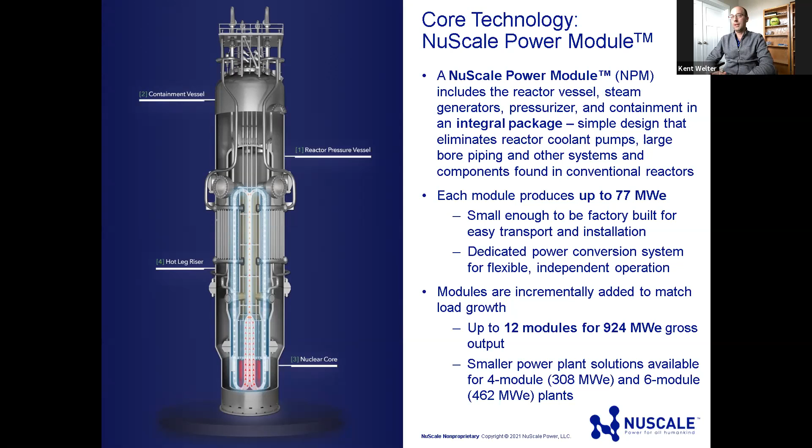We recently got certification for a 12 module reactor, standard plant design in the US, but we have smaller power plant solutions available as well, such as a 4 and a 6 module. Next slide.

This is a simple chart that shows how, on the top left there, number 1, power modules can be factory fabricated and then shipped to a site and installed to meet the power demands of our customers.

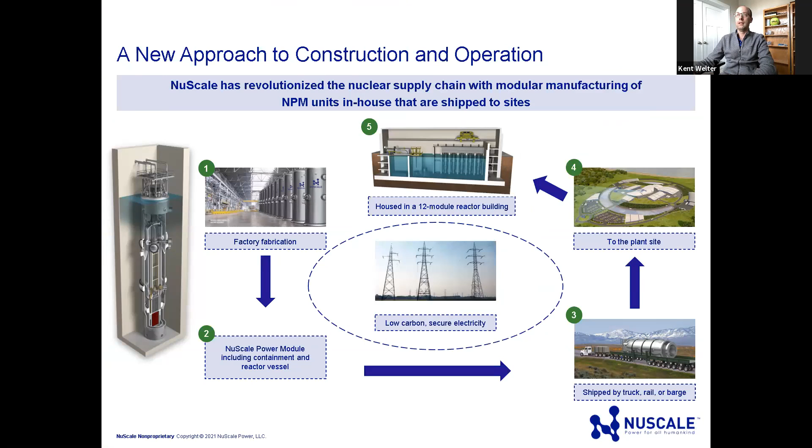As I said, we've received NRC certification last year on a 12 module reference plant. We are working on developing the necessary packages for long lead time procurement in the next couple of years. I'll show a couple slides on that.

So from a systems engineering perspective, I'll be talking about how we're going from the left side of the V into the right side of the V, where we're starting to produce parts, manufacture, and build things.

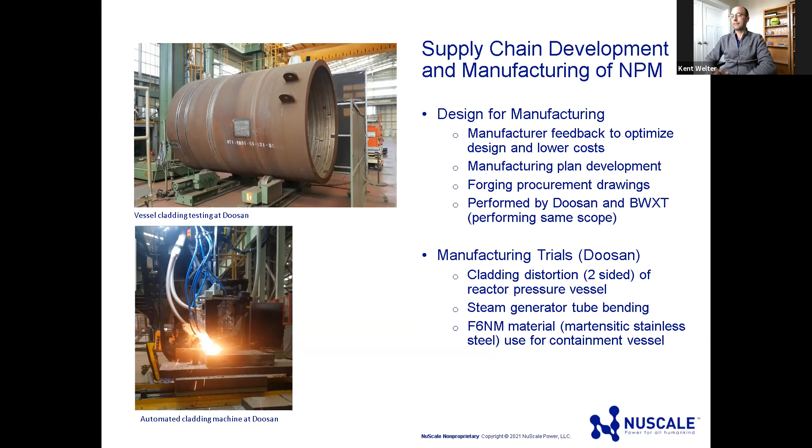So with the introduction to NuScale and where we are in the product lifecycle phases for the first plant, what is systems engineering? In the simplest way, systems engineering is a proven set of tools and techniques for managing the complexity of large projects and products, with the goal to control costs, schedule, and quality.

This figure on the left is the Arcadia model-based systems engineering method. It shows how there are methodologies and tools to take large projects and products and develop requirements, develop different views on how they're going to operate, and how to structure the requirements and products in a meaningful way, such that as designers, when we take a large complex thing and need to break it into smaller pieces to design it within different groups or disciplines, we know how to put it all back together so it works as intended at the end.

I actually gave a presentation, I think towards the middle of last year, on NuScale's model-based systems engineering pilot that we did. I think that was at an ANS meeting, and I have that available for folks if they're interested. Again, it's just a proven set of tools and techniques for managing the complexity of large projects or products.

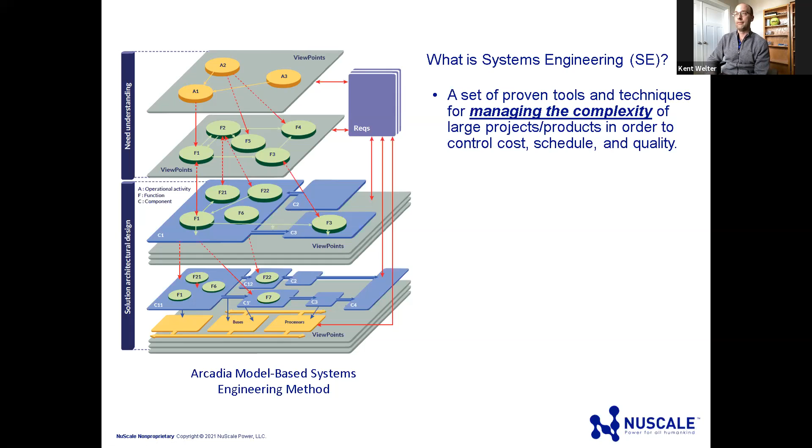An important aspect of systems engineering development and programs are systems thinking and the V development model. There are different versions of the V development model, and there are even W development models. There are different ways to look at it, but it really provides a structured way to move from the beginning of a concept all the way through retirement of that project or product.

The V part really focuses more on the technology development, and this is the NuScale system V model. It's very similar to what you would find if you just Googled system V model - you get a lot of different charts that look very similar to this.

The idea is we often talk about the left side of the V, which is the system definition, requirements allocation, and derivation, where you start off where someone in the business says, hey, we have an idea, or you get from a project office that we had to do this big project or develop this complex product. So you work to define the business requirements and the customer requirements.

Once those are defined, there's a handoff and integration with a design team to start developing that functional design, that architecture, the system requirements and functions. Once that happens, you can start to move into preliminary design, or what's called high-level design - both from a broad perspective as systems are added to that system of systems, and then as you get deeper, you start creating lower level design artifacts, going from step 3 to 4. Obviously all this is iterative between those 1 through 4 steps.

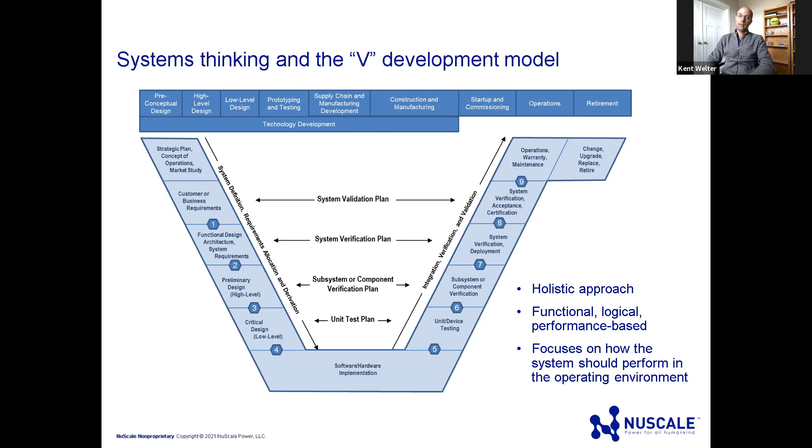Next slide, please. All right, looks like we lost some figure there, unfortunately. Yeah, I'm sorry, Kent. This is the actual presentation. It's not the... oh, it might be animated. Can you click a couple times maybe? I thought we were working off the PDF. Yeah, can you click? There, yeah, it's just a little animated.

I forgot. So the value proposition really for systems engineering is lower cost, shorter schedules. You can absolutely design a nuclear power plant the traditional way. If you could advance again, I think the value proposition really is that by implementing some proven systems engineering best practices, you can shorten that time and reduce the cost.

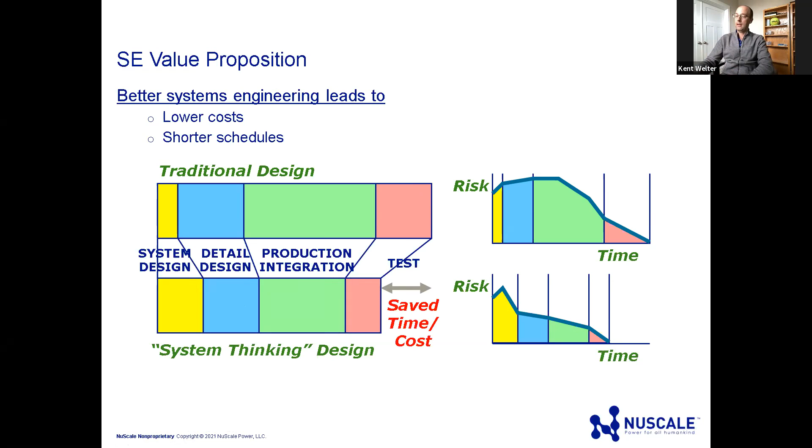Then the question is, well, how much? How much systems engineering does a project need to be successful in meeting the cost and schedule requirements of that project? That's where Eric Honour had done a lot of research over the years, and he's got a great PhD thesis. Where he looked at a lot of mega projects.

Now, I don't know every specific mega project he looked at. I know there were projects from large civil construction projects like dams, to large power plants, to city infrastructure, to aerospace. So it was just a large collection of projects over a certain amount, I think it was like a billion dollars or more, and he looked at and investigated whether these projects finished on time and on budget.

So what you see here is a chart from his thesis, and this gets a lot of traction in the systems engineering world. It talks about schedule versus SE effort. We have actual versus planned schedule on the vertical axis, where one means on schedule, and anything above that is behind schedule. So you can see most of the mega projects were behind schedule, some three times what the original estimated schedule was.

There are definitely more than several that were on schedule, and there were a few that actually beat the schedule. Then what he did is he picked apart their project plans and said, well, how much systems engineering effort was spent versus a percentage of program cost? That's on the bottom there. And what he found was that there seems to be a sweet spot—too little systems engineering effort and you don't get the value, and too much can actually be too much of a good thing.

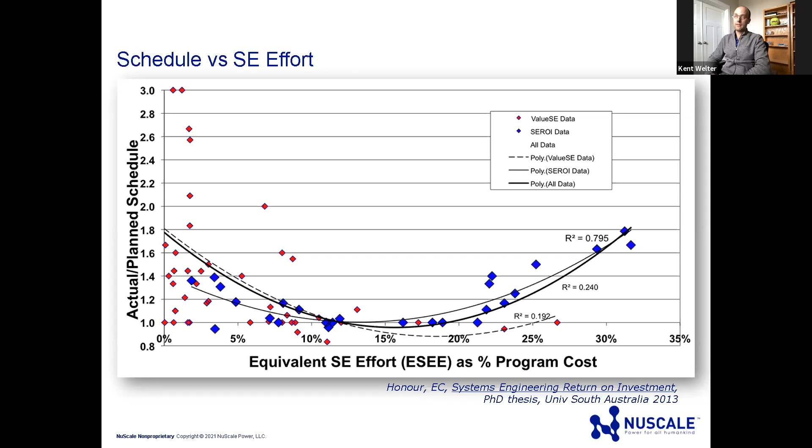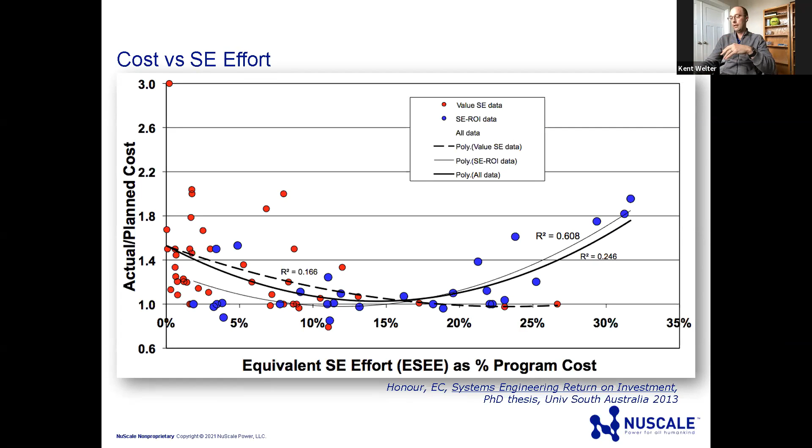But these two figures try to communicate that those programs or projects that were successful from a cost perspective, meaning they hit their budget, what was found was if they spent more time and money upfront defining the project or mission purpose, spent more time and money on technical leadership and management, and in general spent about 14% on systems engineering overall, they did quite well.

What I found is those programs that did poorly didn't spend the time upfront to define the mission, define those requirements and goals for the project. That leads downstream into more effort for integrating those systems on the right side of the V process, and more time in verification and validation because the requirements weren't written in a way that facilitated effective V&V. There was a lot of rework on the back end of that V process.

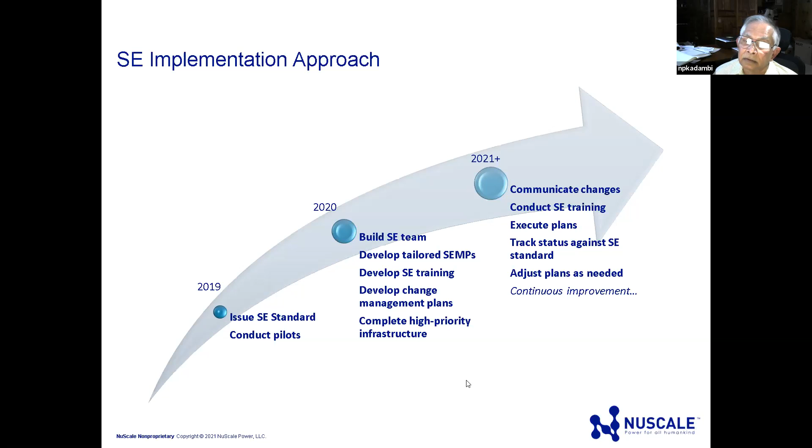Kent, are we showing the right slide? Oh, next slide, next slide. I have next slide, you moved. I had forgotten to advance. I forgot to advance, I'm sorry. Why don't you just catch up to where we should be? Yeah, I'm sorry, next slide. I apologize, I was switching the slides on my computer. So, gosh, thank you for interrupting me, Prasad. I apologize to the audience. Are we at the right place now? Yeah, I'm going to give myself a second to take a break. And Pat, maybe you could go back one slide.